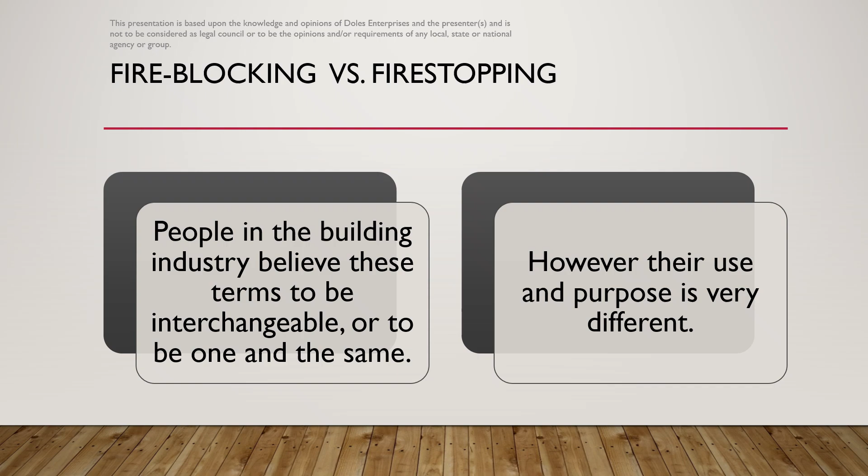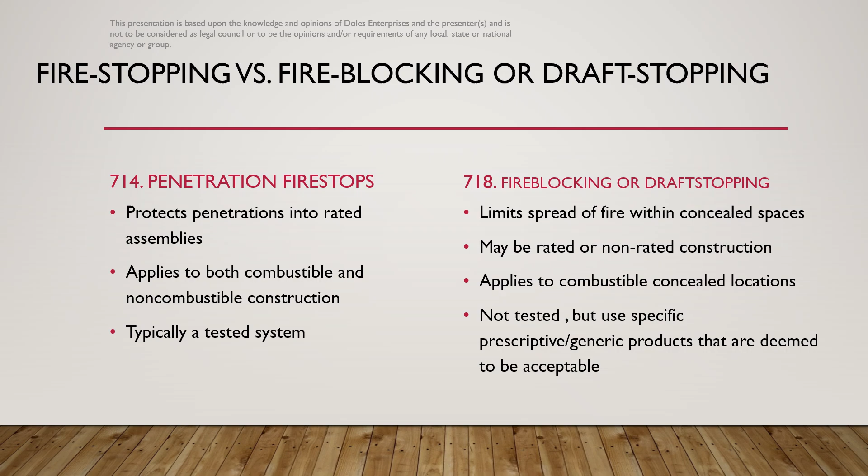Per the IBC, there is a difference between fire stopping and fire blocking or draft stopping. Section 714, Penetration Fire Stop, identifies that penetration fire stop protects penetrations into rated assemblies. It applies to both combustible and non-combustible construction, and typically it is a tested system. Section 718, Fire Blocking or Draft Stopping, limits spread of fire within concealed spaces, may be rated or non-rated, typically in combustible construction, and not tested.

Fire block and draft stop are both addressed in the International Building Code. Fire block is a material whose main purpose is to slow air or oxygen from feeding a fire and to resist free passage of flames or other products of combustion to other areas throughout concealed spaces. It is required by code to be used in concealed locations of combustible construction to prevent fire from quickly spreading through these spaces. Such material will, as an inherent characteristic, also slow the migration of smoke throughout the building.

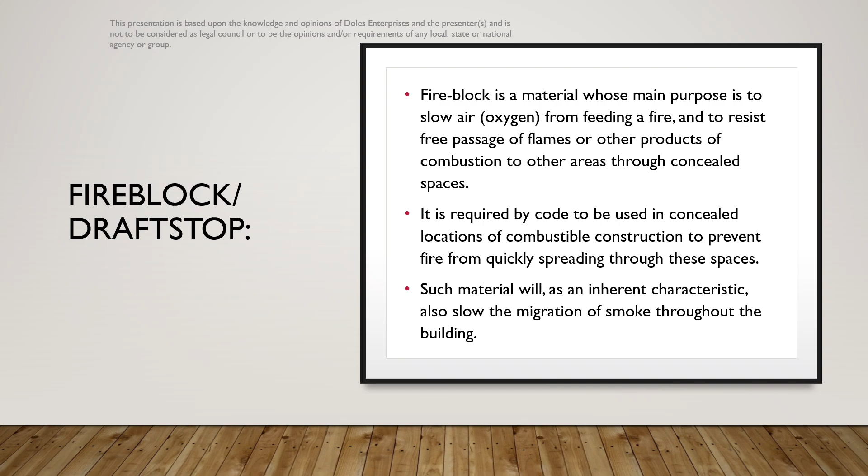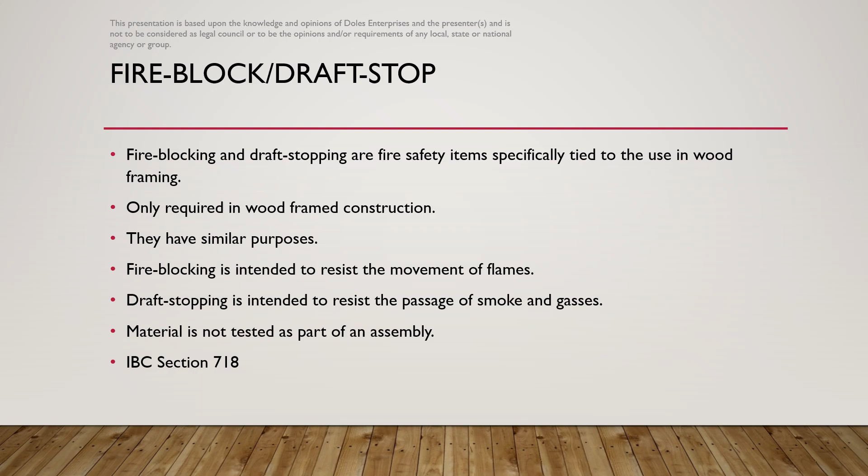Fire blocking and draft stopping are fire safety items specifically tied to the use in wood framing. They have similar purposes. Fire blocking is intended to resist the movement of flames. Draft stopping is intended to resist the passage of smoke and gases. These materials that are used are not tested as part of an assembly. Refer to the International Building Code, Section 718.

True or false? There is no difference between fire stop and fire block. Penetrations of fire-resistive assemblies are addressed in Section 714 of the International Building Code.

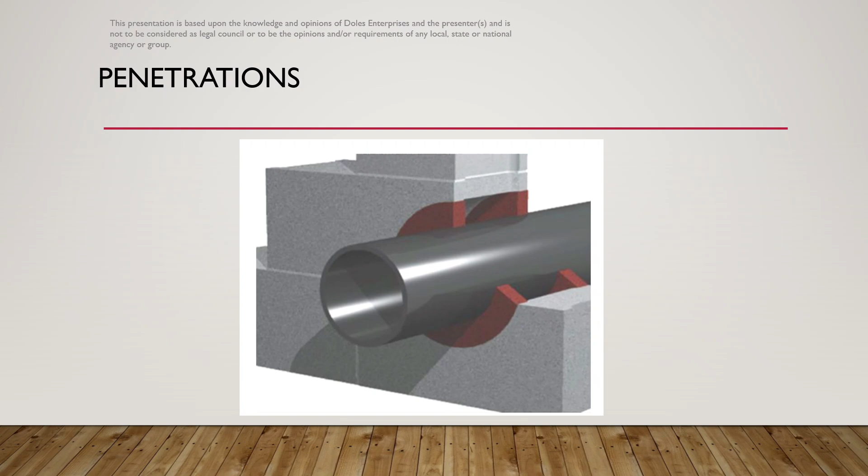Through penetrations shall be protected by an approved penetration fire stop system installed as tested in accordance with ASTM E814 or UL 1479. The key phrase here is installed as tested. The installed system shall exactly match the UL system as it was tested.

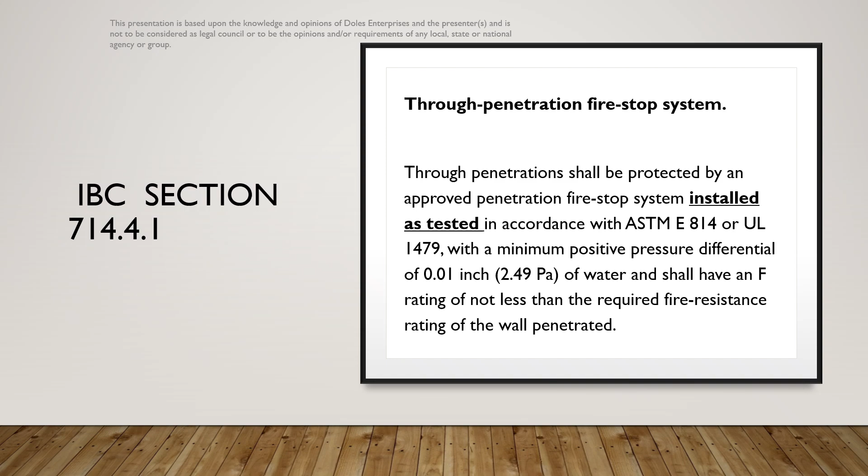A through penetration fire stop system consists of a fire rated wall or floor, a penetrating item such as pipe, cable, or conduit, and the fire stop sealant. For rated systems, the complete fire stop system is tested and listed, not just the fire stop sealant alone. Fire stop materials are not fire rated. The system in which they are installed carries the rating.

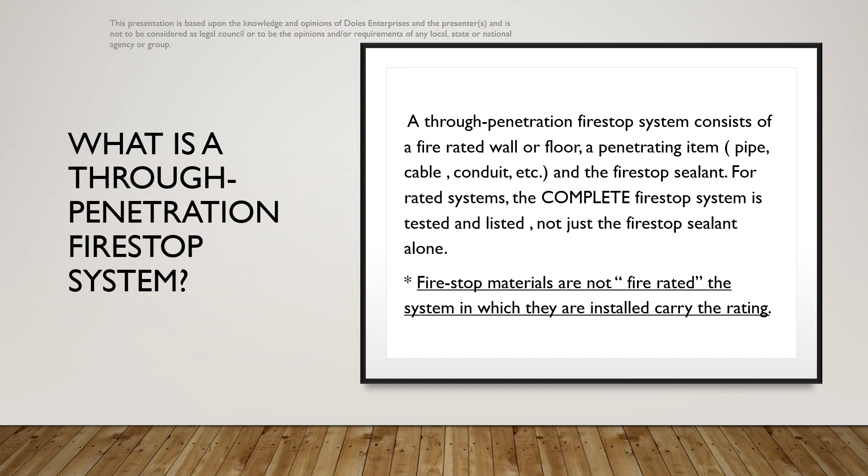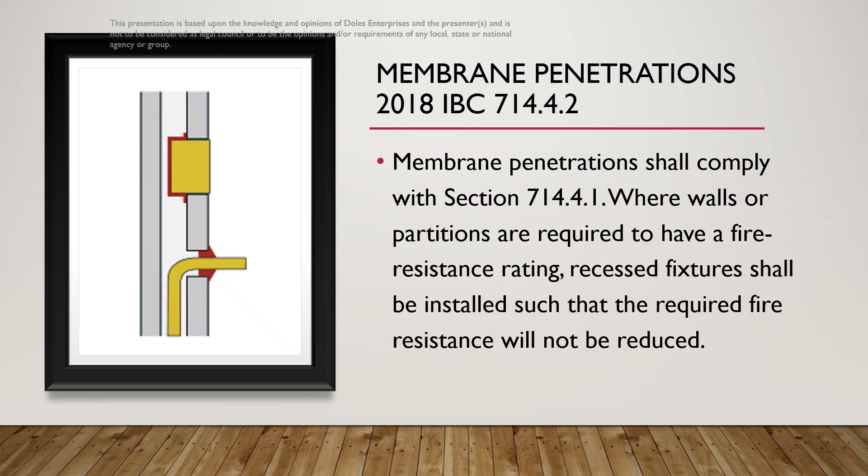Membrane penetrations shall comply with Section 714.4.1. Where walls or partitions are required to have a fire resistance rating, recessed fixtures shall be installed such that the required fire resistance rating will not be reduced.

Joints installed in or between fire resistance rated walls, floors or floor ceiling assemblies, and roofs or roof ceiling assemblies shall be protected by an approved fire resistant joint system designed to resist the passage of fire for a time period not less than the required fire resistance rating of the wall, floor, or roof in or between which the system is installed.

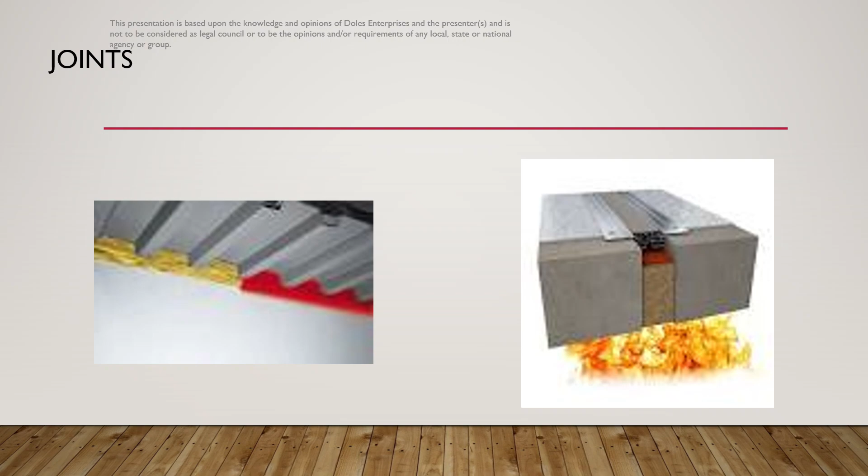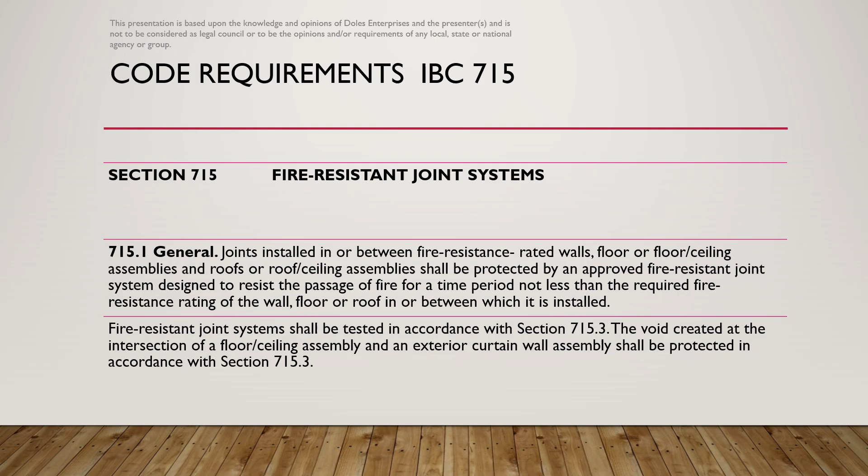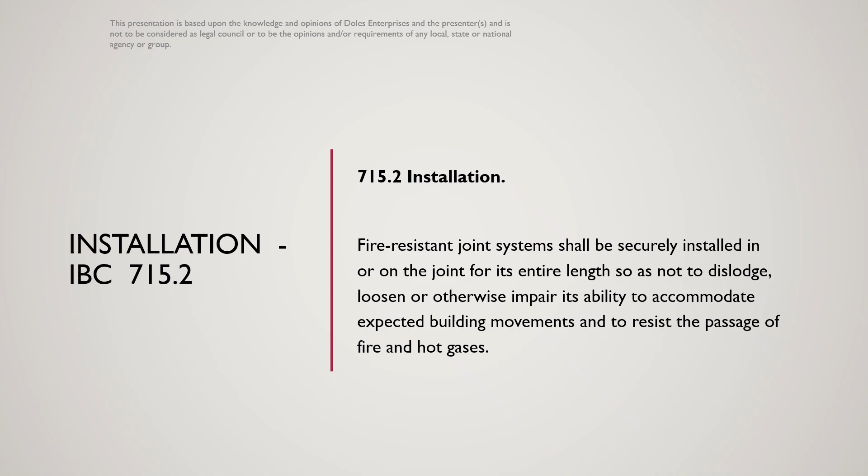Fire resistant joint systems shall be tested in accordance with Section 715.3. The void created at the intersection of a floor ceiling assembly and an exterior curtain wall assembly shall be protected in accordance with 715.3. Fire resistant joint systems shall be securely installed in or on the joint for its entire length so as not to dislodge, loosen, or otherwise impair its ability to accommodate expected building movements and to resist the passage of fire and hot gases.

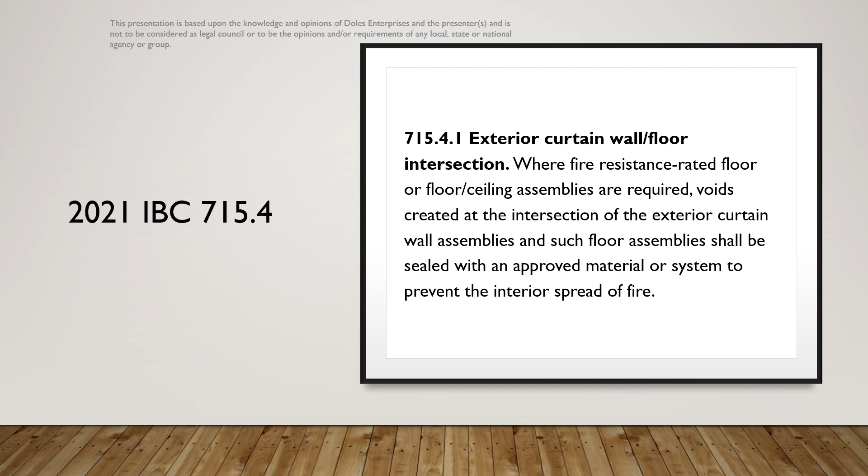Where fire resistance rated floor or floor ceiling assemblies are required, voids created at the intersection of the exterior curtain wall assemblies and such floor assemblies shall be sealed with an approved material or system to prevent the interior spread of fire. Joint systems shall be tested in accordance with the requirements of either ASTM E1966 or UL 2079.

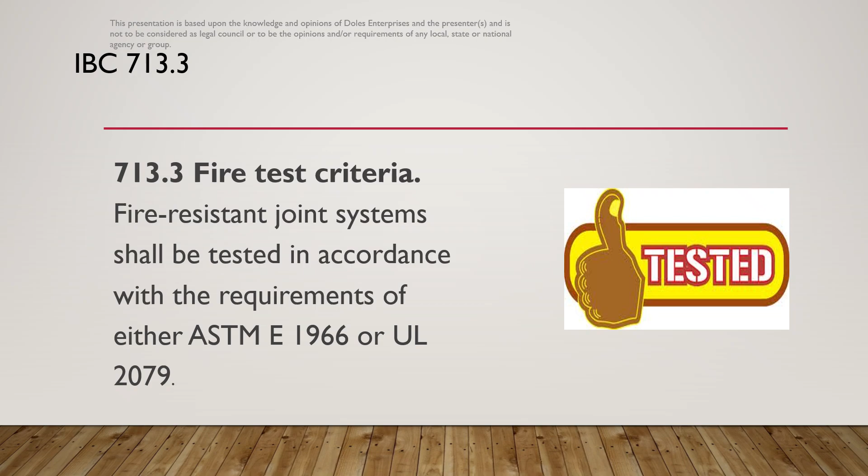Before we go any further, let's have some curtain wall basics. What we're going to be discussing here is multi-story buildings, where the slab goes just shy of the outside curtain wall.

The curtain wall has its own support mechanism. We have this gap that exists from the edge of the slab to the curtain wall. This can be 1/8 of an inch, or it could be 6 or 8 inches, depending on the building and its design.

What we're trying to prevent is the flow of fire or smoke from a story below to the story above through this opening that is created. Therefore, mineral wool is the most typical application to fill this gap, along with another application, which is all part of a UL design assembly.

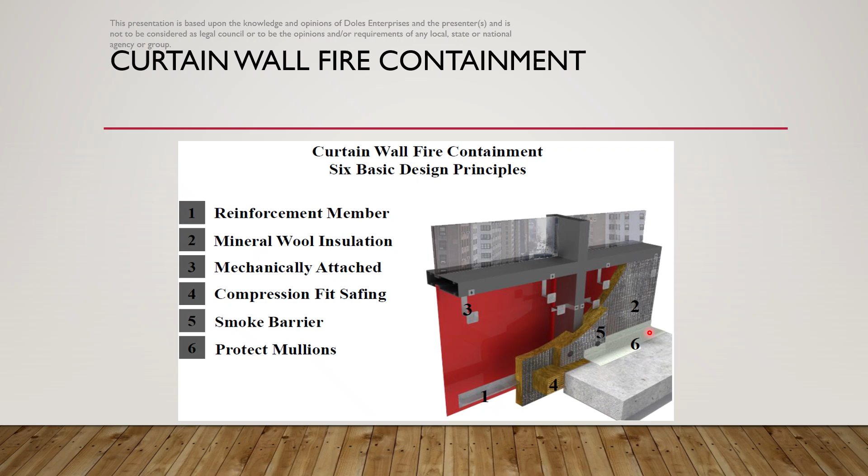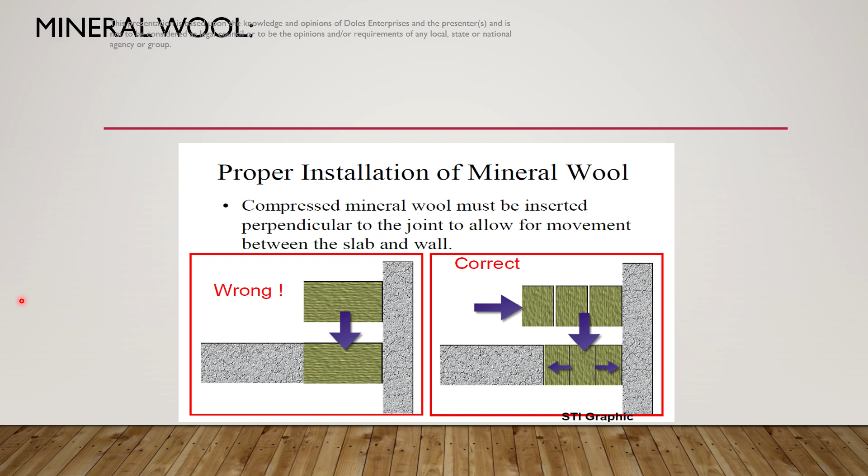The UL design for this curtain wall application needs to be followed exactly. Typically what I see is the mineral wool application incorrectly applied. Mineral wool is typically listed as a certain compression, and it's also listed as how it should be applied and the orientation of the grain. Each of these items needs to be closely examined when you're conducting your field inspection.

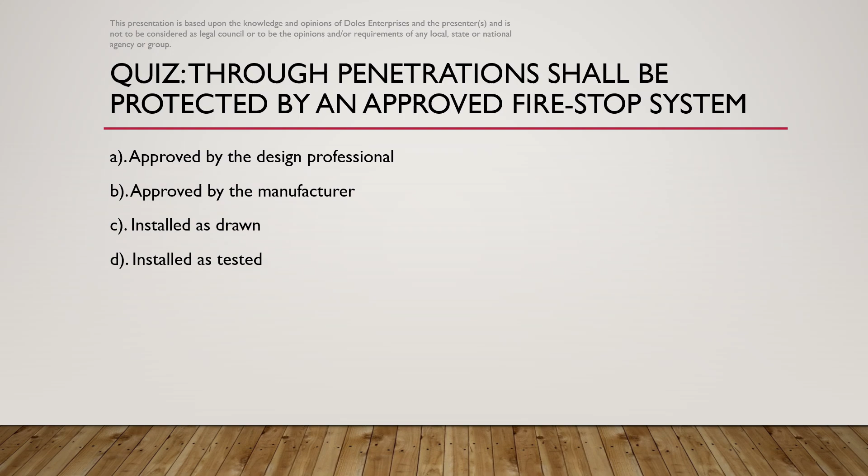Beginning with the 2012 edition of the International Building Code, special inspection of firestop systems, fire-resistant joint systems, and perimeter fire containment systems installed in high-rise buildings and buildings defined as risk category 3 or 4 were required. The proper installation of these critical life-safety systems helps protect the building and its occupants against the spread of fire, heat, smoke, and toxic gases should an event occur.

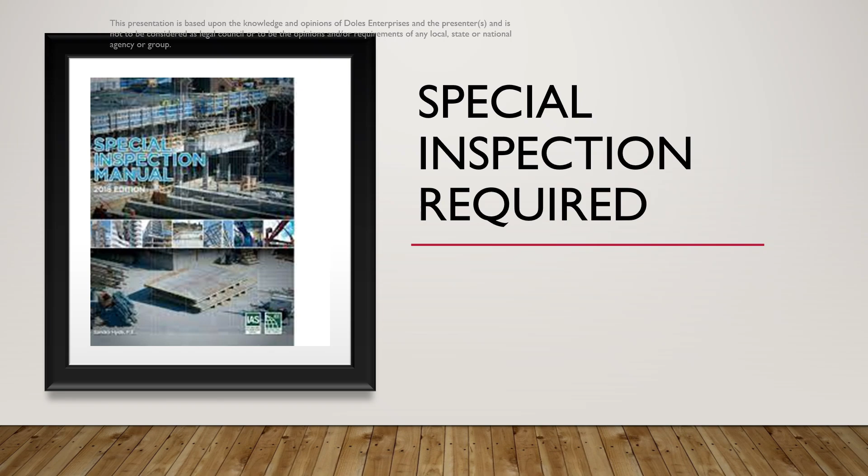Chapter 17 of the International Building Code provides a variety of procedures and criteria for testing materials and assemblies and labeling materials and assemblies. Its key purpose is to establish where additional inspections, observations, and testing must be provided, and the submittals and verifications that must be provided to the building official.

Chapter 17 expands on the inspections of Chapter 1 by requiring special inspections by a qualified individual where indicated, and in some cases structural observations by a registered design professional. Quality assurance measures that verify proper assembly of structural components and the suitability of the installed materials are intended to provide a building that, once constructed, complies with the minimum structural and fire resistance code requirements as well as the approved design.

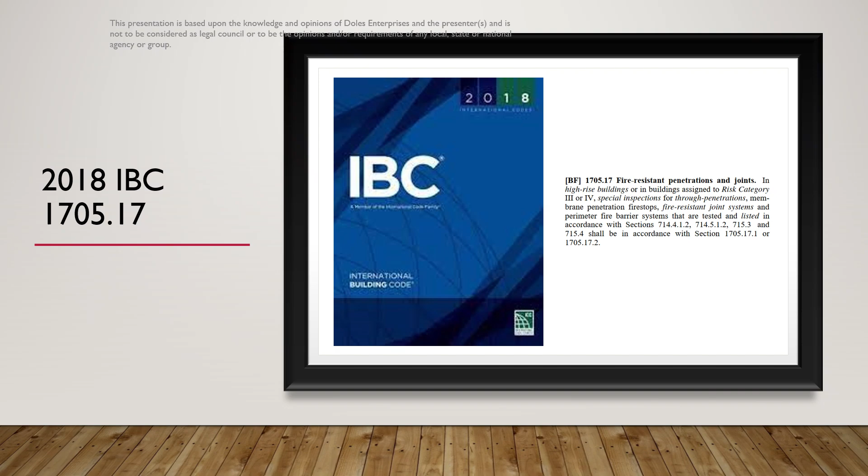In addition to requiring special inspection of firestop systems, the inspection process is also clearly defined, referencing ASTM E2174 and ASTM E2393.

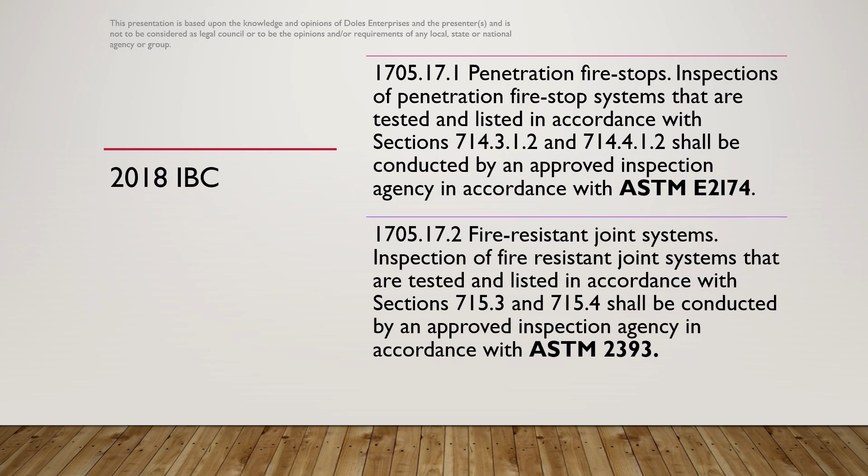ASTM E2174, Standard Practice for On-Site Inspection of Installed Fire Stops. This lists very specific requirements for sampling, verifying materials prior to installation, verifying that EJs are not being used when there are listed systems available, verifying that all firestop systems have been completely installed, verifications for each type of firestop, and witnessing 10% of installations or destructive testing of 2% of similar installations.

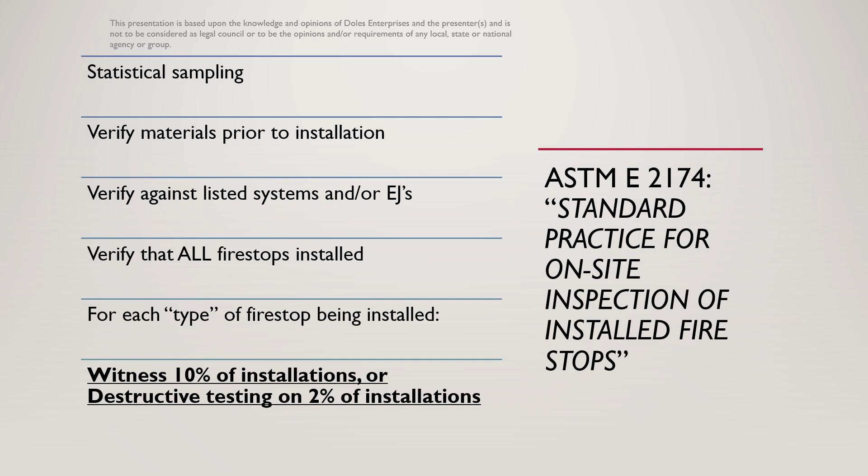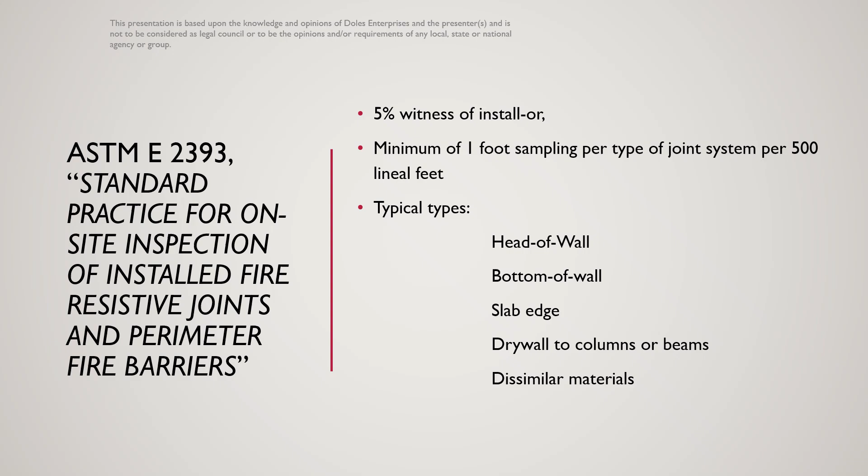The IBC also specifically lists ASTM E2393, Standard Practice for On-Site Inspection of Installed Fire-Resistive Joints and Perimeter Fire Barriers. There are some specific requirements here. Typical types of inspections include head of wall, bottom of wall, slab edge, drywall to columns or beams, and dissimilar materials.

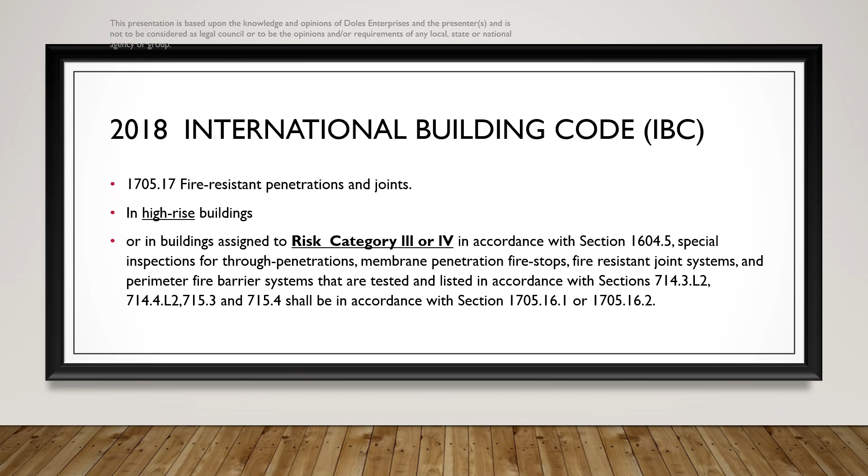The requirement for third-party special inspection does not mean that every project needs this level of scrutiny. The building code clearly relegates this to three types of buildings: high-rise buildings and buildings in risk category 3 or risk category 4.

First, the term high-rise conjures up a mental image to most people, but let's be clear about what the term actually means. A high-rise structure is defined by the code as a building with an occupied floor located more than 75 feet above the lowest level of the fire department vehicle access. This means that you can take the same building and put it in a different jurisdiction, and based on the firefighting equipment, it will be considered a high-rise structure in one jurisdiction, but not in another.

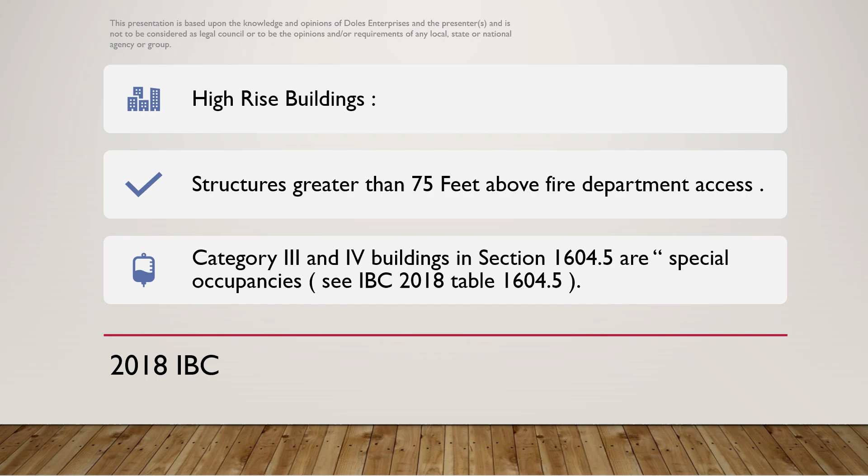The occupancy load will vary based on the use of the building, but also because of the familiarity and the agility of the occupants. For example, people in a public assembly building are less likely to be familiar with the various ways to enter and exit the building, as compared to people who might be in a building for adult education.

While occupants of an elementary or secondary school are likely to be familiar with the building, they are less likely to be expected to exit the building safely in an emergency. Additionally, occupants of a Group I-2 hospital are likely going to need assistance to evacuate, and you don't want occupants of an I-3, a jail-type structure, being able to freely evacuate a building.

If there is a fire in any of these types of buildings, you can see that there is a substantial hazard to human life in the event of failure.

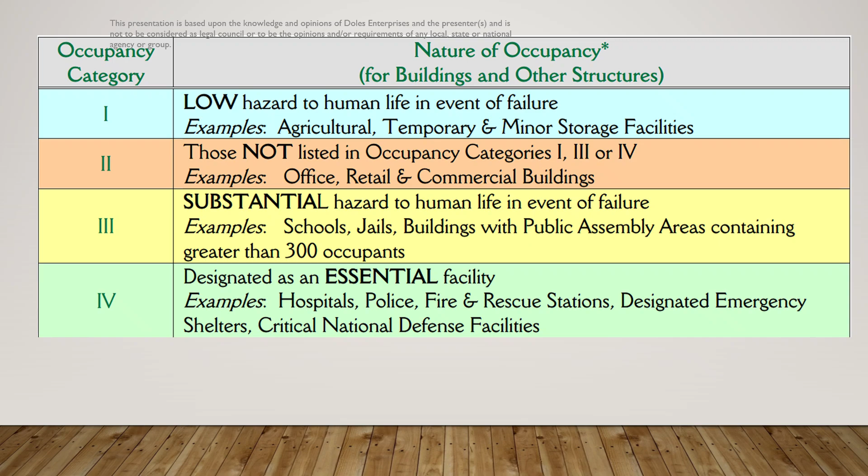Category 3 is defined by the code as structures that represent a substantial hazard to human life in the event of a failure. This means that because they are buildings important to the community, they should be protected with an extra level of protection provided by this requirement for special inspection of Firestop.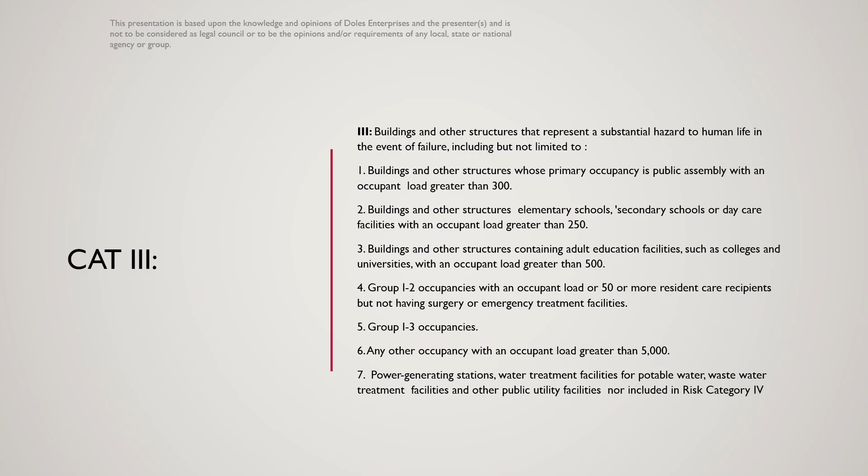Category 3 buildings include public assembly buildings with an occupancy load over 300, elementary or secondary schools or daycares with an occupancy over 250, adult education with occupancy over 500, and Group I-2 with occupancy over 50 without surgery or emergency procedures.

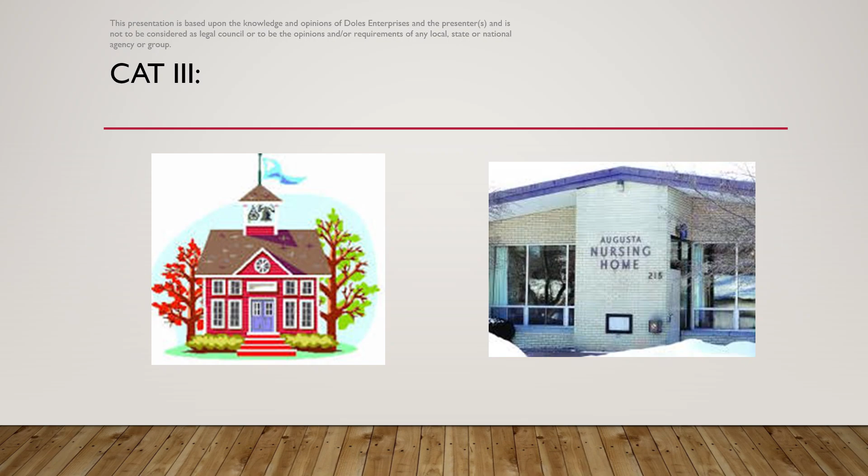Category 4 buildings are buildings and other structures designated as essential facilities. The difference between risk category 3 and 4 is that type 4 buildings are considered essential to the community in which they serve. Schools in a community are essential, but in the event of a fire, the children can still be educated in a different setting until the school is repaired.

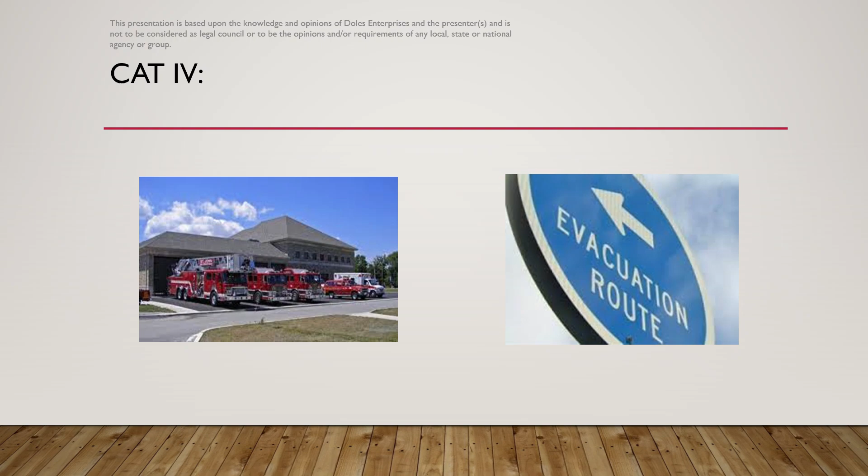However, if that same school were designated as an emergency shelter, then it would fall into risk category 4 because now it is considered essential to the community.

When reviewing submittals, the plans examiner should be cautious concerning the statement of special inspections being used. Some of the older forms do not have a listing for special inspection for Firestop.

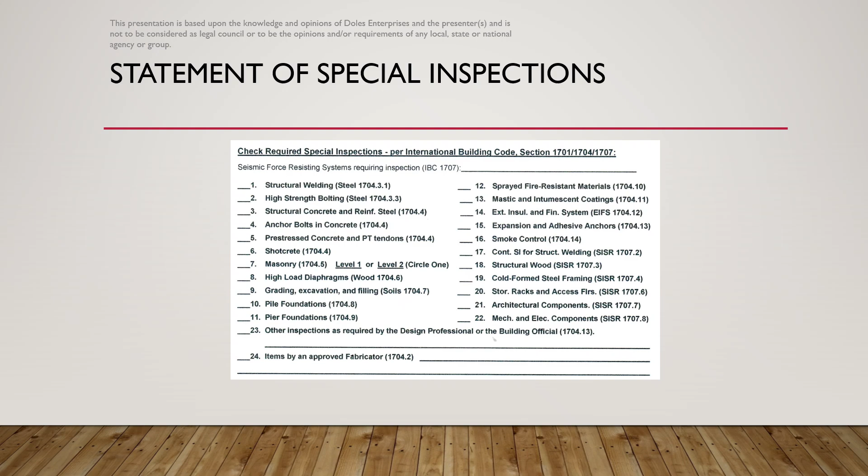This covers where third-party special inspection is mandated by the building code. That said, a jurisdiction can still require third-party special inspection of Firestop on any project where they feel they have a shortfall in either manpower or expertise. This can even be done in a jurisdiction on an earlier code edition.

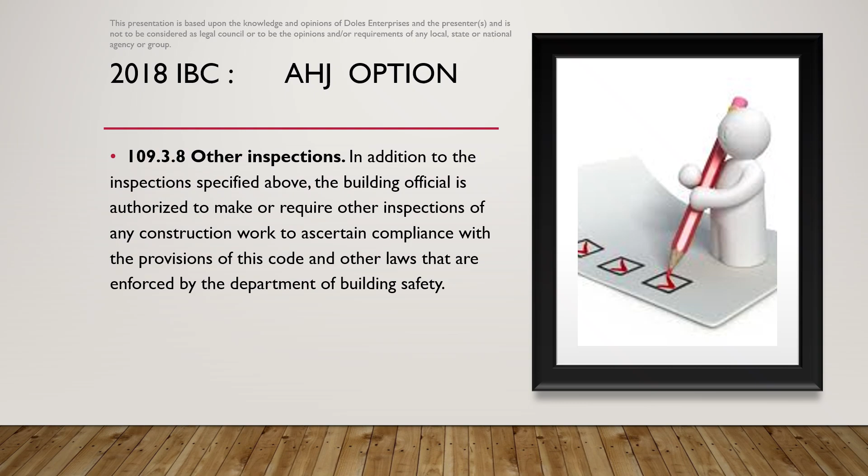True or false? Penetration Firestop is required to have special inspection for Category 2 facilities. Fill in the blanks: How do we address the intersection created at a fire barrier and a non-fire rated assembly? When is an engineering judgment typically not acceptable?

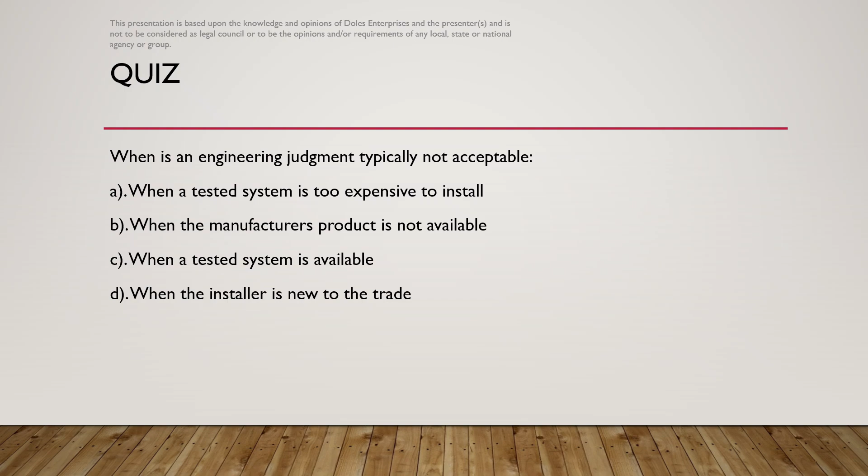This concludes this section of the training on Firestop. Remember, there were 5 different sessions. I ask that you go through each one.